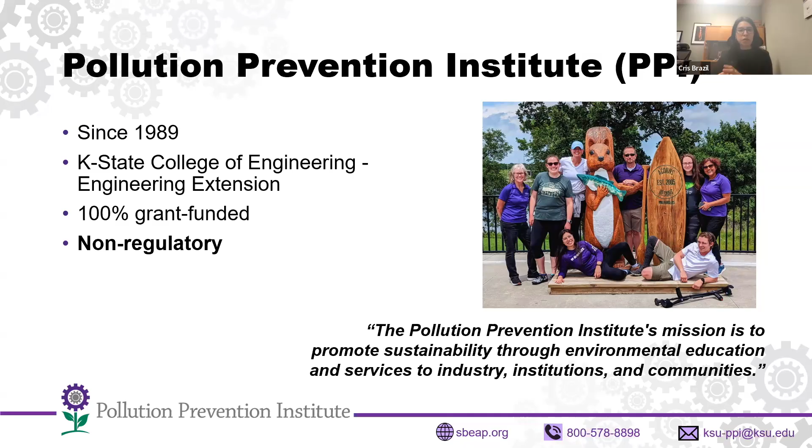So to start, who we are: we were founded in 1989. We are part of the College of Engineering, the Engineering Extension Department. We are very proud to say that we are 100% grant funded. Currently our funding comes from either KDHE, the Kansas Department of Health and the Environment, or the EPA, the Environmental Protection Agency. We are a non-regulatory program. We don't do any sort of enforcement. Our role is mainly educational. We promote sustainability through environmental education and services to industries, institutions, and communities.

In our institute, we house the Small Business Environmental Assistance Program, or SBEAP. Each state has one, and here at K-State we operate the Kansas unit. We do environmental compliance assistance on-site and off-site for any small business, mostly under 100 employees. We are free and confidential. If you're a larger business and you also have some questions, please reach out. We can always provide some sort of support. If you have any questions when it comes to compliance, we have a really great team that can help you with that realm.

And we also house the Pollution Prevention P2 program, in which we provide technical assistance to any size industry, so there's no small business limitation. We can do workshops, seminars, and we create educational materials with our main goal of spreading P2 awareness. We have two new P2 grants that will be starting in January 2026, so we have a lot of new projects coming in a lot of different areas, including breweries, community events, and our internship program.

Our internship program is one of the main projects that we have under our P2 program here. This is an 11-week program that includes 1 week of training and 10 weeks of on-site work with the interns. We do the whole process. We hire the interns, we train them, and then we mentor students throughout the summer. So it's basically like having full access to our PPI team while also having access to really amazing students doing hands-on projects that will provide you with real benefits.

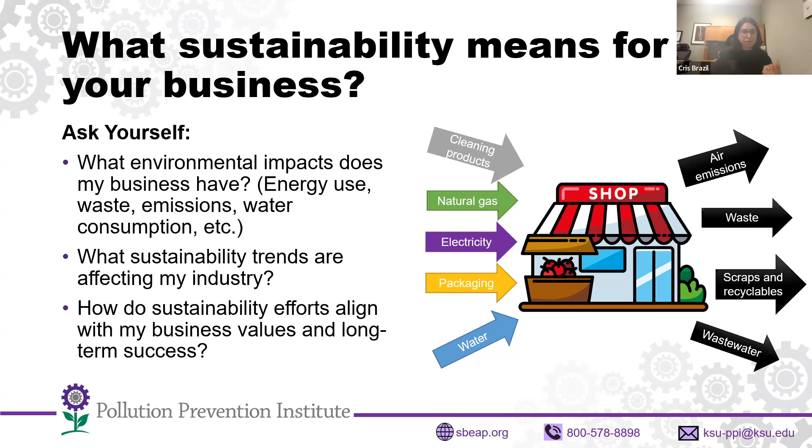And how does this align with my business goals? If your goals include things like reliability, lower cost to operate, fewer surprises during audits, P2 is definitely the shortest path to achieve that. So again, a quick pulse check on why this matters beyond simply being green, why sustainability and P2 help beyond the helping-the-planet side of things.

P2 cuts waste that you might be paying for twice. When you buy things, you're paying for it, and when you throw it away, in a lot of cases, you're also paying for it. So LEDs, fixing leaks, right-sizing equipment, so you can lower bills, have less downtime, and a lot of other increases in efficiency overall. When you use safer materials, closed processes, it can mean fewer reportable quantities, simpler permits, fewer what-happened investigations.

For brand reputation, customers and communities know when odors drop, when you see less glare from lights at night, when the waste trucks are showing up less. And this definitely builds trust for your business. We have the side of employee attraction and retention. Cleaner air in the plant, simpler standard operating procedures, safer handling make jobs much easier to do and to keep, especially when we're talking about new hires.

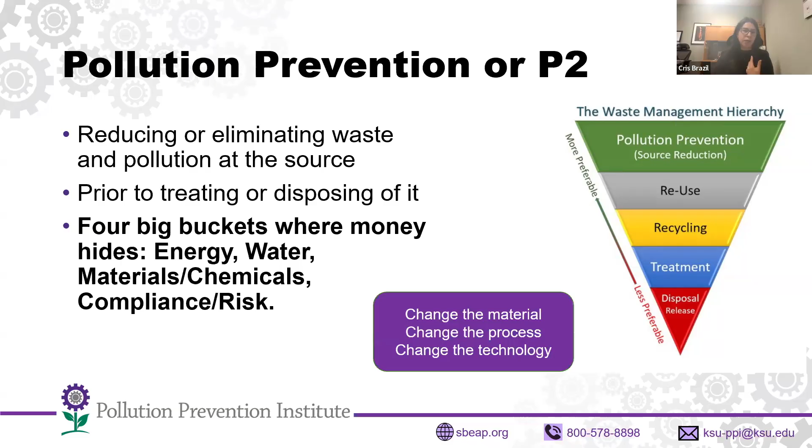Okay, so zooming out from that more micro perspective and getting into a more macro perspective when it comes to pollution prevention, we need to talk about how the work done inside an industry can affect other things that surround that specific industry location. So that includes neighborhoods, schools, small businesses, downwind and downstream.

So for example, if we reduce the amount of toxic chemicals being used by an industry, we can achieve lower regulatory burden, like we mentioned before, reduce the amount of material being purchased and waste being generated. We have the increase sometimes in operational efficiency, but we also have other benefits.

So for example, if you have less VOCs in the air, you have cleaner air, and that affects also the community and nearby residents. If you have better storage, labeling, spill-proof chemicals, you can also protect local waterways and aquatic systems in case there's any sort of accident. For the workers, you have a healthier workplace, less contact with those chemicals.

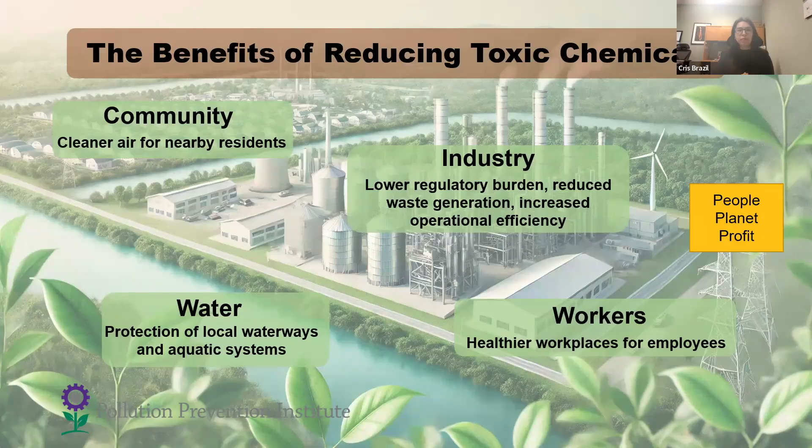So a quick pit stop before we jump into some tactics, because there are some other P2 benefits. We already mentioned a few of those. But I also wanted to briefly mention that one other benefit that we're seeing, and it has a pretty strong connection with how we do P2 in the program, is building a shortcut to some certifications. For example, the ISO 14001 that is related to environmental management systems.

So every time you swap a solvent, you're fixing a leak, you're doing any sort of P2 project, you might be actually building ISO pieces. And that can happen in very different forms and ways. And if you're familiar with those ISO certifications, there are many clauses that are actually covered, and it makes the whole process of doing that management easier.

And also, again, the compliance that gets everything simpler. So you have fewer toxics on site, you cut the potential number of emergency scenarios, which also ties back into, for example, the ISO certification. So you spend less time having to explain potential accidents, and inspections might end up getting a little bit boring, which is good.

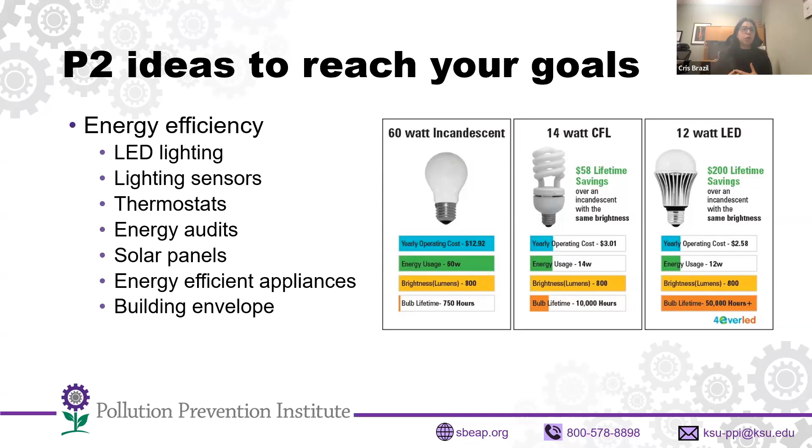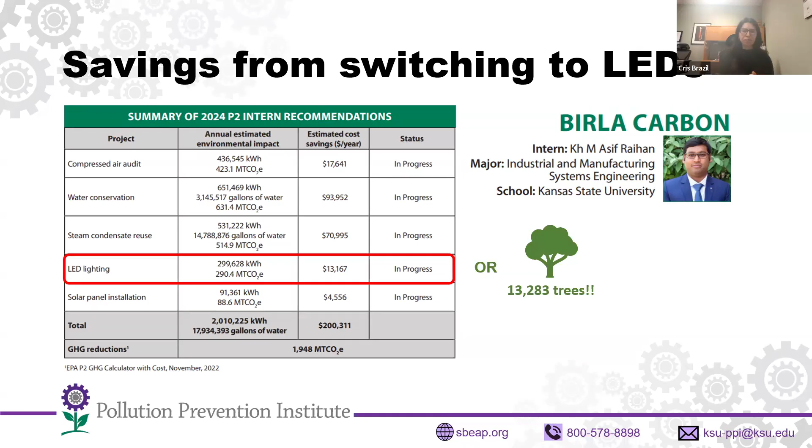So the company decided to go for it and implement the project. So they have this project currently in progress. And for example, when we think about projects like LEDs, which are right now pretty much a bread and butter project for us, it's pretty straightforward. But at the same time, we have the profit side of things. We have cost savings. I've never seen an LED project that would not have a decent payback period. And when I say decent, I'm saying something like 2-3 years. It's pretty common to have actually much less than that.

So decent payback periods, a much longer lifespan. So we know that LEDs last much longer. And on the planet side of things, of course, we have less emissions from electricity. We have the reduced waste from bulbs. So instead of purchasing bulbs every maybe 3 years, you're purchasing every 10. So there's much less waste being generated.

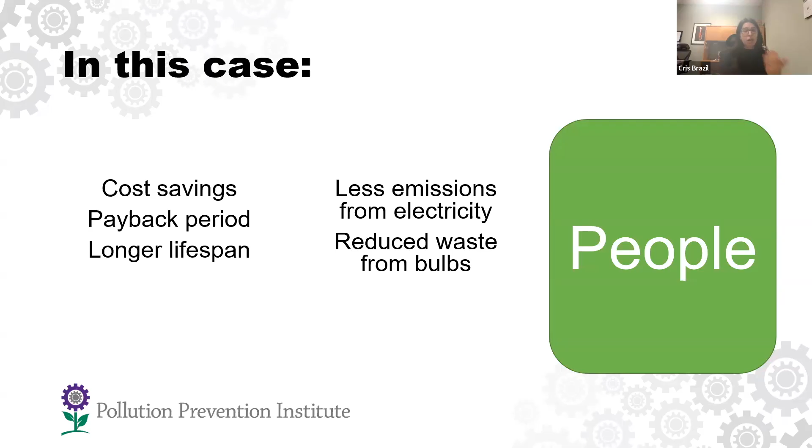And on the people side of things, we always like to point out that there's some benefits that some people might not initially identify. For example, some of those old bulbs might have some mercury. Definitely want to get rid of that. Less hazardous materials for people to handle. We can increase the lighting. Sometimes those older lighting systems are not as efficient or they don't produce as many lumens or brightness. And we can fix that and create a safer environment when that's applicable. The other way around also works.

And less maintenance hassle. So if you go to an industrial facility, sometimes we have those fixtures that are really up high. We need to get a lift, a scissor lift sometimes, to go and make those replacements. There's some risk related to that. There's time, there's cost. So all those things get tackled. And whenever we work on a project with a company, we try to show them all the potential benefits that we can identify under those three different criteria.

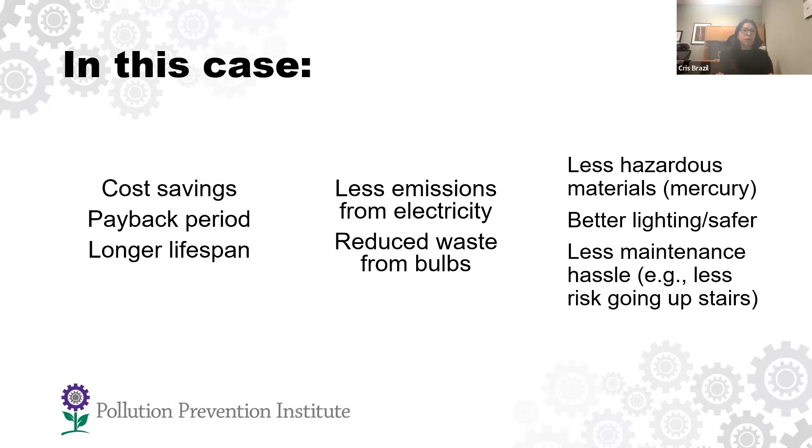In terms of energy efficiency, we've been working with companies on replacing their motors with variable frequency drives. It definitely doesn't work for everyone. It's assessed on a case by case basis. But again, we're seeing so many benefits related to more energy efficient equipment. Compressor systems, so many benefits from conducting those audits, or sometimes even replacing the whole system with something a little bit more modern.

Sometimes people have those compressed air equipments for decades. So sometimes they get really attached. They see that the new one is very expensive, but there are a lot of savings sometimes associated with getting a newer piece of machinery. Boilers and ovens, so we look into sizing, insulation, maybe the technology. A lot of companies are trying to get away from gas systems and switching to electric.

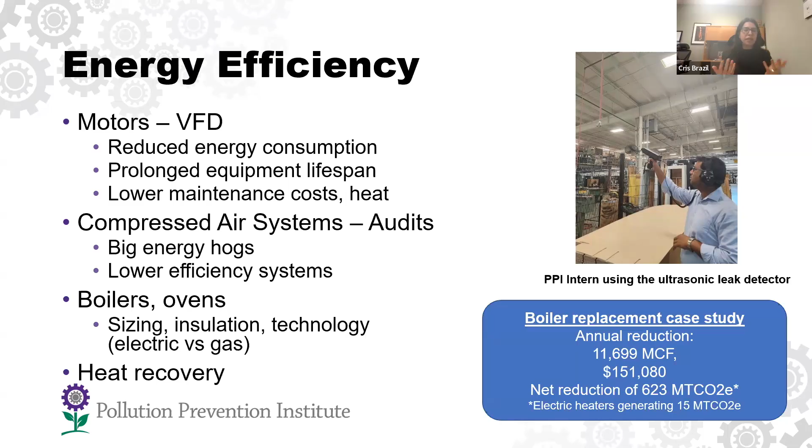We did have an example of a case study with a company that replaced their gas boiler that was huge for the type of line that they were operating with a simple electric heater system, for plating more specifically. And they saw about $150,000 in savings per year, and that's including the electricity costs for the heaters. So the sizing sometimes makes a huge difference.

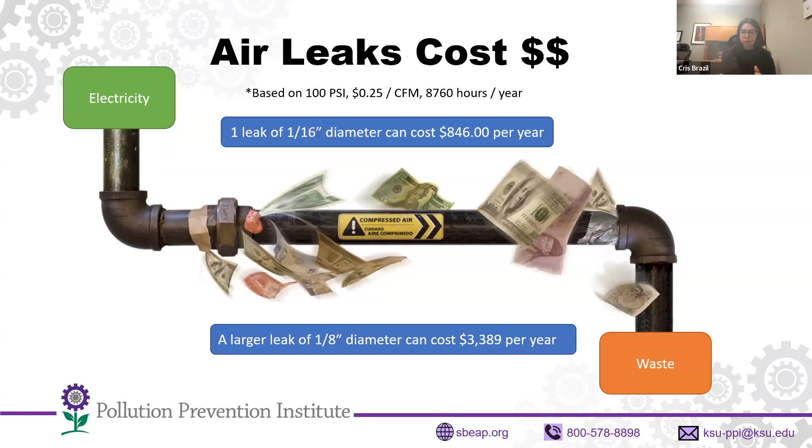And again, like I said, we still see so many companies that benefit from simple air leak audits, and this is something that our interns and our team are trained to do. We have compressor systems that can help actually quantify that data. So we have the equipment, we can bring it with us and do those calculations, provide you with tags, mark those leaks, how much they are costing you, so you can have an actual, tangible number for your savings.

Another thing to mention is solar panels. So like I said, we still see so many companies interested in solar panels. We did have another one this summer. I'm going to bring up his case summary really soon. But the intern from 2024 also investigated that, and the company wanted to check if that would be feasible for their whole operation, which wasn't really the case.

So sometimes we do the calculations and we don't believe that it's worth it right now to have the whole operation relying on solar panel systems. But for them, for example, they saw a clear benefit from installing solar panels for their office space. So they are moving forward with this project and hopefully having this wrapped up really soon. And they are seeing some good benefits.

There's of course some investment related to that, and we always check what the company's goal is when it comes to a payback period. So if the payback period you're looking for is something around, let's say, 5 years, and we see that a solar panel for your goal is something like 20 years, we would not be recommending a project like this to you. But again, it's your data, it's your information, so you can do whatever you want.

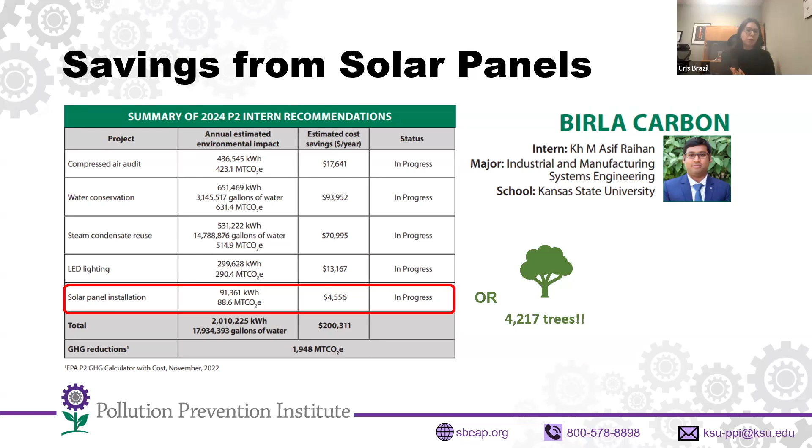So another bucket would be the water one, water conservation. And this, again, really depends on the processes that you have in place. But we look at ways of reducing any losses that you may have right now. So leaking faucets, toilets, nozzles, pipes, and steam systems. We can do a steam trap audit. We do have the equipment for that, and interns frequently do that as well.

We can look at ways to reduce the overall usage of water, if we can shut off processes, low flow and automatic shut off options. And even then we can take the reuse route to see if we have any sort of gray water that can be reused within the system. So as a pre-rinse, for example, in cleaning cycles, or maybe used in irrigation.

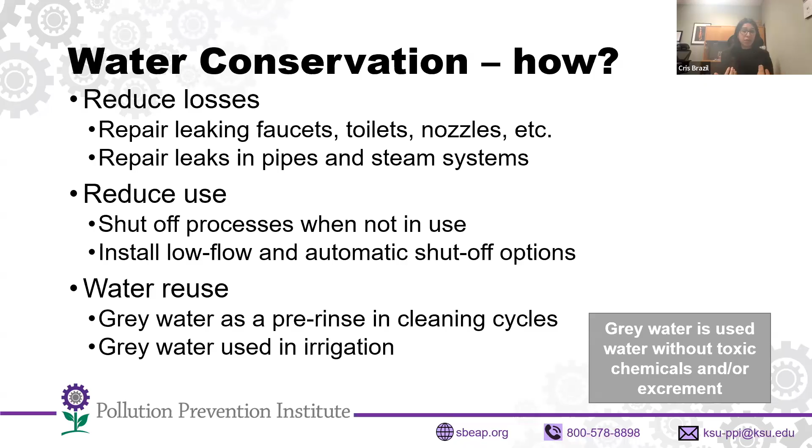So next we have chemical reductions. So we frequently look into ways to first reduce the amount of hazardous materials being used, and that could be in the form of looking for safer chemical alternatives. To do that, we have plenty of amazing resources. One that I really wanted to mention here is the Toxics Use Reduction Institute, TURI. So they have amazing tools that can help you identify safer chemicals to use in your process that will at the same time meet your quality standards for your cleaning process or degreasing process.

So they have an amazing database in which you can enter your substrate, so what type of material you're trying to clean, what is the contaminant that you have, and what is the solvent that you're using. And they can give you data related to tests that were conducted by their lab that effectively cleaned similar situations to yours. So it can be very overwhelming: okay, I want to get rid of that toluene that I have in my operation, but I have no idea where to start. There's like hundreds of other potential solvents. I don't even know which one is safer, which one is less toxic. Is that even going to work for my current process?

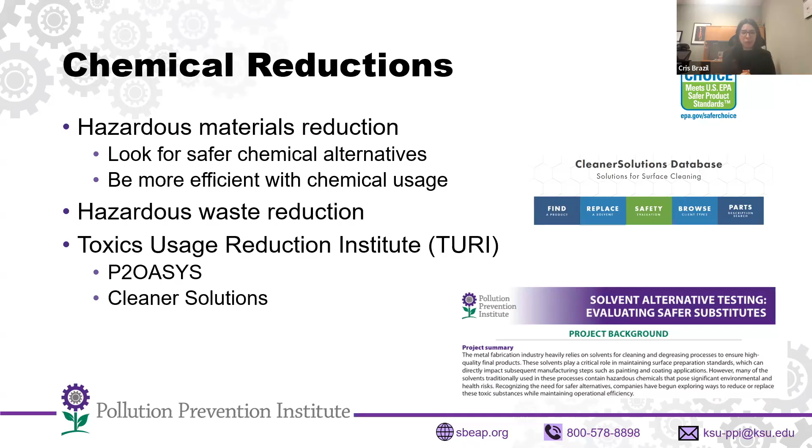And I wanted to highlight a couple different projects related to chemicals. So paint mixing process improvement. They were wasting some paint with 2-part paint kits. They were manually mixing them, and that was resulting in a lot of waste. So the intern investigated using a proportioner device. So instead of having to mix the whole kit, they could do that with a proportioner system.

And also industrial painter training. So the intern identified a vendor that was providing virtual reality training. So this not only helps painters increase their transfer efficiency by getting trained on better techniques, especially when we have some positions like painters that have a really high turnover rate. So definitely helpful to increase that efficiency.

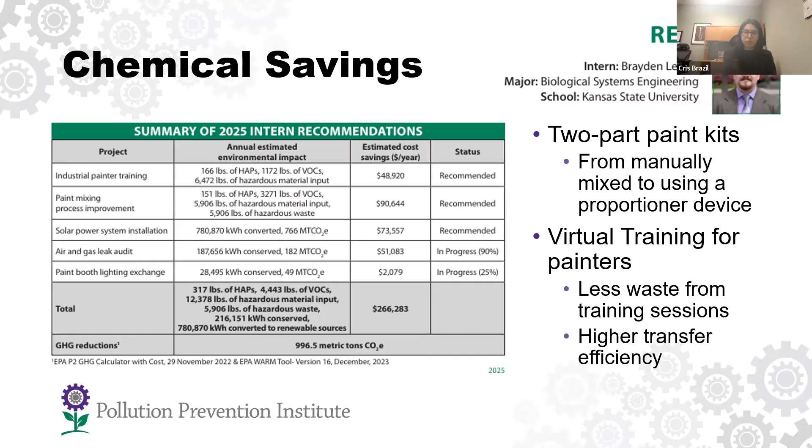So here's an example of the type of work that an intern normally does that can turn a P2 into some ISO ready progress. So interns start with a baseline analysis. Wherever they go, they want to understand the current situation so they can actually look for alternatives and analyze which alternative would be the best for the company.

If the company already has a predetermined goal that they want to achieve, for example, reduce VOC emissions from parts cleaning by 60% by a specific date, we could definitely work with this goal. So the first thing that we do, if you're familiar with the SMART technique, the whole idea is to look for specific, measurable, achievable, relevant, and time-bound goals and objectives.

So if we start with the goal, let's say that it's to cut VOC emissions from parts cleaning by a specific number, by a specific date, by replacing, let's say, toluene with an aqueous washer on some lines. So this is specific, this is measurable, this is time-bound, and so on. So how we're going to do it, we're going to use a hierarchy to find alternatives that will help you achieve this goal, and we understand how they classify within our hierarchy.

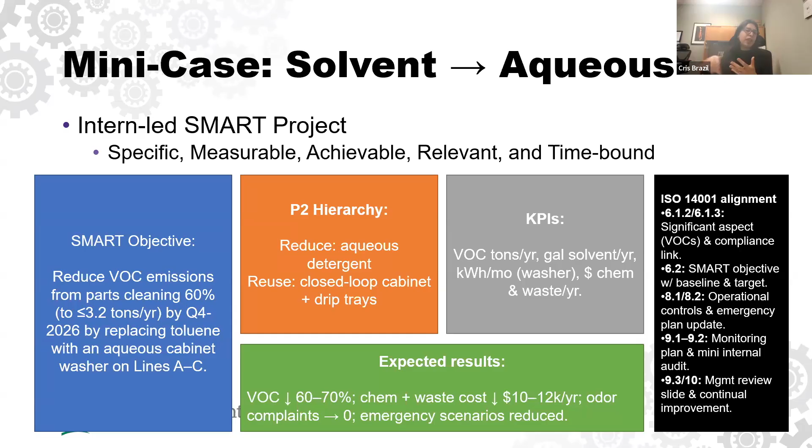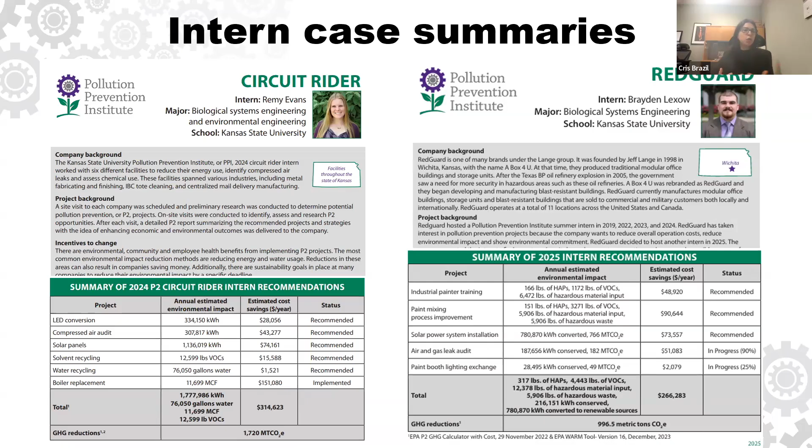Along with the case summary, interns have a presentation that's posted on our website, and they also provide the company with a full comprehensive technical report that is confidential to the company. So all the data collected, all the analysis, all the quotes, invoices, everything that was used to make those numbers come to life, everything is reported in there and it's yours to keep. And again, do whatever you want to do with that information afterwards.

So we'll be having a class in January. I wanted to bring this up because I think this is a good resource for people. It's a class at K-State, but people can take it for professional development credits. It's called CS690, Industrial Environmental Sustainability. It's a 1 credit hour course, 3 days, pretty straightforward. This is part of what we train interns with.

So we offer this class twice a year, in January and in May. And in May, that's when we combine the class with the internship program. So that first week of training, they go through this class and a little bit extra bureaucracy that pertains to the internship specifically. But they start from scratch. What is pollution prevention? What is sustainability? Tools, calculators, equipment, everything up to date so you can actually provide tangible results and know where to start.

Going over some more resources, I wanted to talk about our website, and I'm going to go over a few different things we have available. Under the engineering extension, we have the Kansas Energy Program. They also have amazing resources and capabilities for energy audits, for example. We have the Radon Program, and I will also have some slides for the KSU Technical Assistance to Brownfields tab.

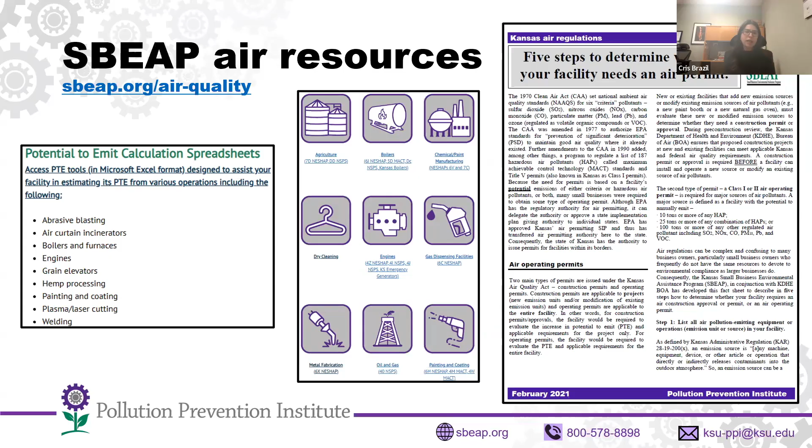So there's a lot of resources from the Small Business Environmental Assistance Program. I'm just going to briefly go through some slides with some different options. So potential to emit calculators, determining if you need an air permit or not. For hazardous waste, we provide the hazardous waste compliance calendar. So if your business is interested in one, please feel free to reach out.

We have some training available for Kansas that is actually 100% virtual. We have a bunch of videos on our YouTube page that also help you determine hazardous waste categories. We have videos for P2 stuff as well. So again, we have a lot of resources available. Water: construction stormwater permit tool, do I need one? Septic tanks, guidelines, again, a lot of things available. So if you have any questions, or even if you're not quite sure where to find a resource that you're looking for, you can always contact us.

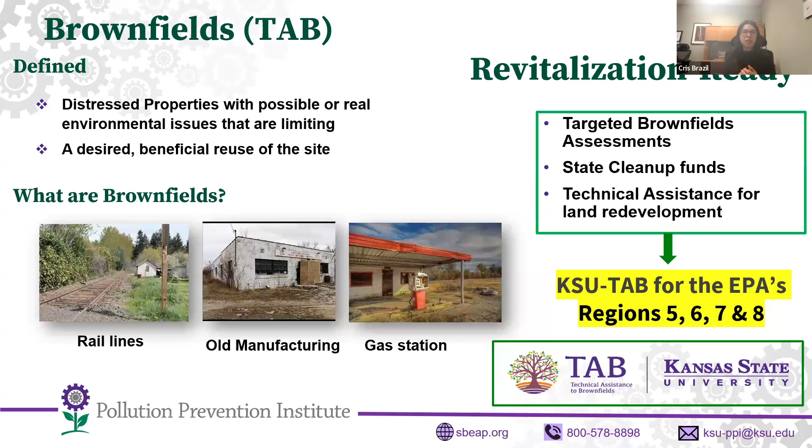And another resource I wanted to mention, the Brownfields TAB is actually part of the College of Engineering as well, just like us. Brownfields are properties that need to be basically revamped so they can get used. They may be an old manufacturing facility, an old gas station, and the KSU TAB can help you acquire brownfields, assess them, do some planning related to how to redevelop that area, help you connect with funding opportunities. They're an amazing program. So if you have any ideas in mind, or if you know someone or a group that might be interested, please forward them this information because again, they're really great.

So to wrap things up, one big message, we always like to explain that when you have cleaner operations, you have healthier communities. That's the tie-in that I wanted to make. As a company, you can make choices. You can improve things. You can reduce chemicals. You can enhance efficiency, and you can create a healthier environment, not only for the workers, but for nearby communities, and the overall planet. So it's really a win-win-win when it comes to P2.

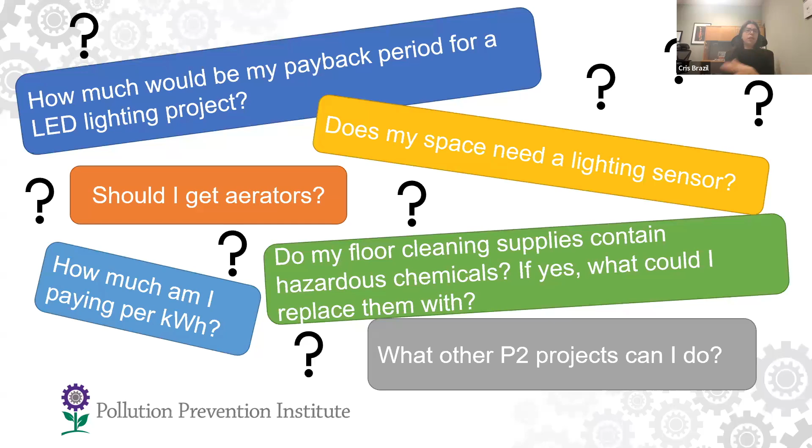Then after watching this presentation, you might be asking yourself some questions like, okay, but I'm not sure which project I should do. I don't know if I should get a lighting sensor. I have no idea if an LED makes sense for me right now. Is there even a better technology available for my process? And I want you to have this key takeaway, that, of course, sustainability is achievable. We start upstream, measure what actually matters, and we can improve in small cycles. It's not like you're going to become a super green company or institution immediately. It's a process, and the important thing is to start.

P2 works best if you do those, changing the material, the process, technology; you will definitely have multiple benefits. And also P2 projects can create a lot of materials that can be used in an environmental management system. So we have objectives, we have controls, we have metrics, records that are very helpful for any institution or industry.

And the most important thing is that we can help. So we have that free confidential support for small businesses when it comes to compliance. But for the technical assistance for P2 and the interns, we can work with anyone. We have been doing work with institutions, with cities, with communities, with, of course, industry. So anyone that will benefit. And if you feel like you have anything that we can help you with, please, please, please reach out.